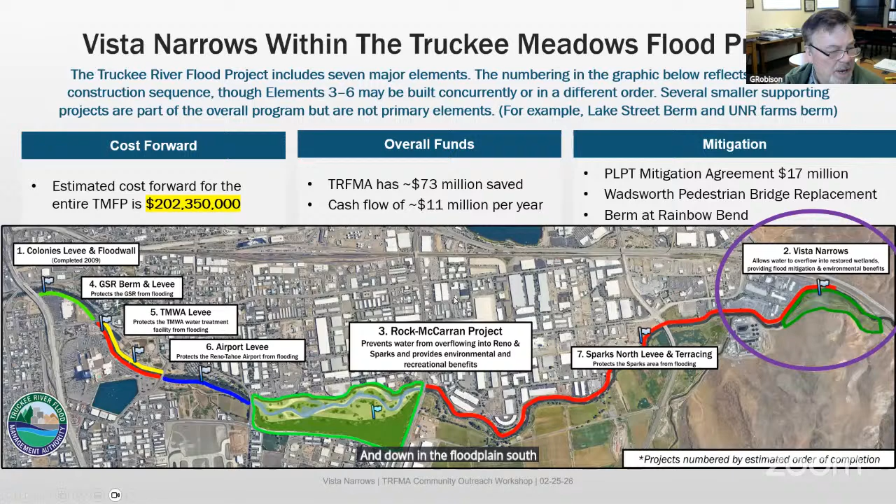So why are we doing this? We want to take this area—in a large flood, all this in blue becomes flooded. And if we do build the Meadows project, everything in green is taken out of flooding.

This area encompasses the Sparks industrial area down here in the downstream part where my cursor is, then the west Sparks industrial area, then the GSR area, the airport, and the Reno industrial area. These are all areas with lots of jobs, lots of people working, and some housing.

Taking all this out is a huge amount of the total damage of a flood. It amounts to 75 to 80% of the total damage you'd see in a large flood in the Reno Sparks area.

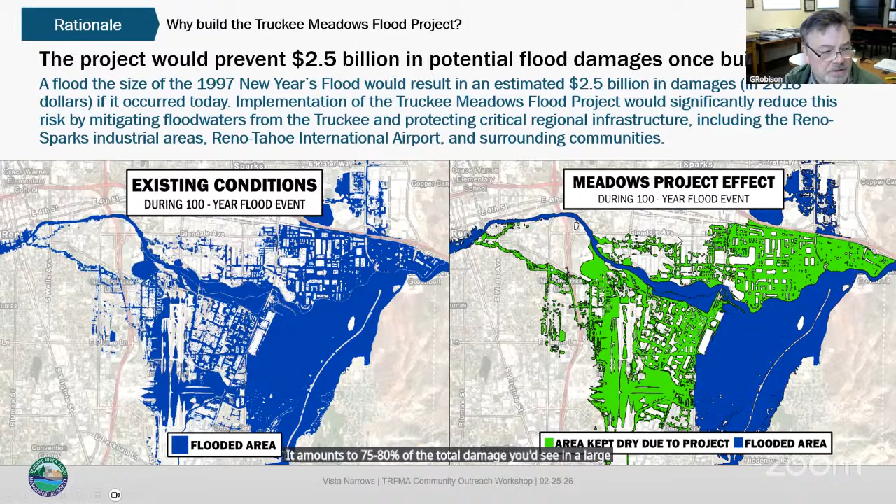So what is the Vista Narrows project specifically? It's basically 3 terraces. We used to have up to 6, but through various analysis we did very detailed modeling. Our consultant, Atkins Realis, with a team of other consultants such as HDR and JUB and others, built a very detailed 2-dimensional model and did lots and lots of iterations.

We did this to figure out how much we need to shave off here to create a flood flow that keeps the water level down upstream, but minimizes the amount of water that's going to go further downstream—limiting the water upstream, but not having too much water going downstream.

Through that iterative analysis, we were able to get this to a place where these three terraces look like what we're going to be doing. In the final design, we now have a more sophisticated model, and we're going to double check that and really hone down on these terraces, possibly saving a bit more money than it already will by going from 6 terraces to 3, and also get this to the optimum for the water level versus the peak flow downstream.

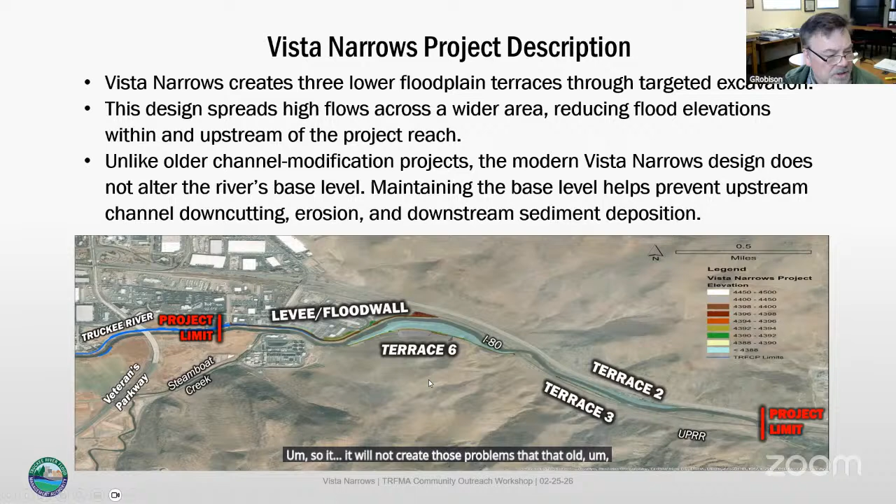The history of the Vista Narrows project is that Vista was always going to be done because it provides mitigation for the rest of Reno. There's a lot of water stored in the airport and industrial areas. When you develop all that and dry them up, all that water is going to come down at once and create a higher water level, backing up into the university area and also into places like Pembroke and Hidden Valley. We don't want to create a better situation in one place and make it worse somewhere else. We want to make sure we're not making things worse in other parts of Reno and Sparks. So what this does is lower that water level to make up for that loss of storage.

This idea has been around for about 25 years. However, a serious design—not just people's ideas and sketches—was never done until the spring of 2018, which culminated in a 65% level design in 2019.

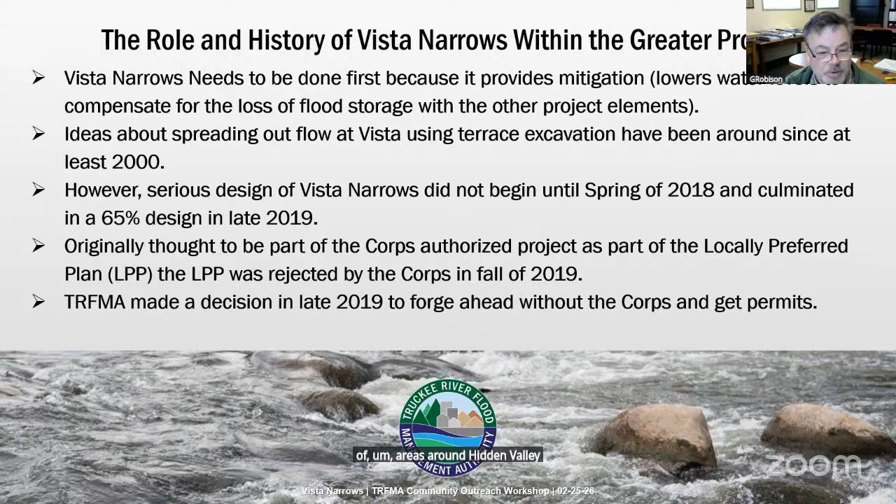So what I was saying is that a lot of water is stored in these green areas. When it was originally flooding, some of these places had 10-foot deep water in some of this area here, which is no longer holding water if we build the project. That way the water comes down here much faster into this area and raises the water level without the effect of Vista Narrows. So when you open this up a bit, that allows the water to come out and keep this water level at or below what it was originally.

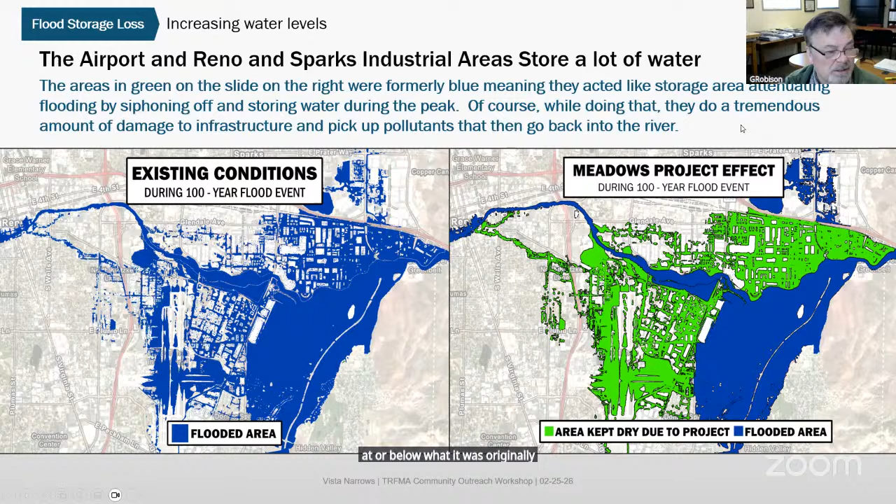So that's what this looks like. Everything in green is actually a lower water level. This would be almost the same—up to about a foot difference. So you can see all lower water levels because of Vista Narrows with the entire project built out. These other colors are actually rises in water levels, but that's staying within the river itself, inside the levees. The point is, it's all lower, and that's what we want. We want a no-rise in water surface elevation, so we don't cause more problems for people by drying out these other areas.

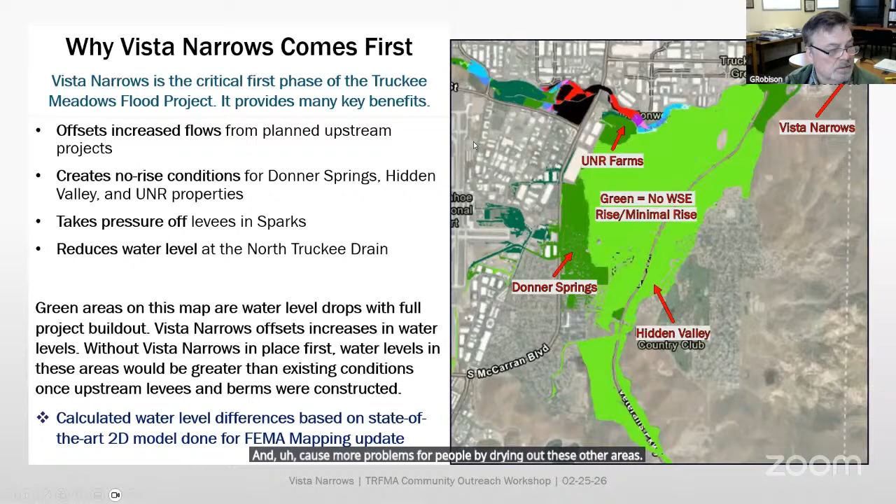So how do we do that? What does it look like? This is a picture from a few years back of Vista Narrows. You can see this bank is 15 feet high, and the vegetation on top is something called white top, a very dry, introduced species, along with sagebrush and things like that. This is a floodplain, or a high terrace, disconnected from the river because the river has downcut.

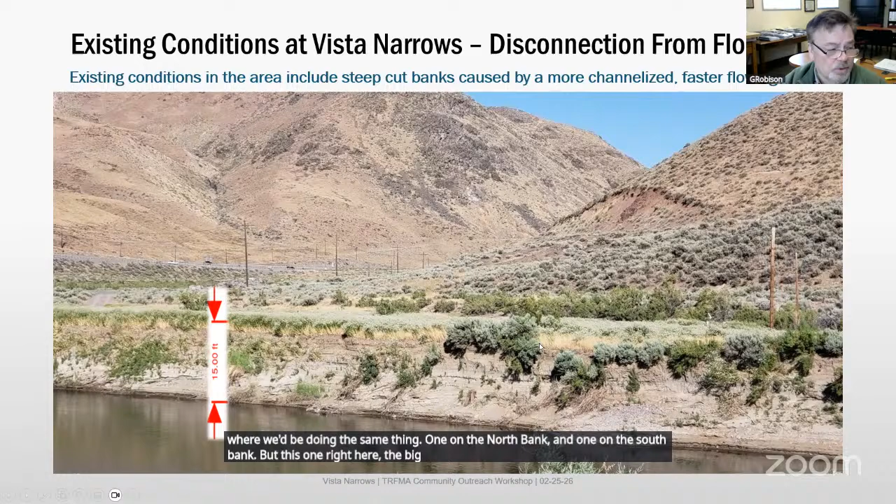So that's 15 feet right there. The idea would be to cut this down to a much lower level where the river can interact with more natural vegetation such as cottonwoods, willows, other species, so you can create this area where the water can spread out to the south at this particular terrace. There's two more terraces downstream where we'd do the same thing, one on the north bank and one on the south bank. This big terrace here is on the north bank, and the idea is to cut this down.

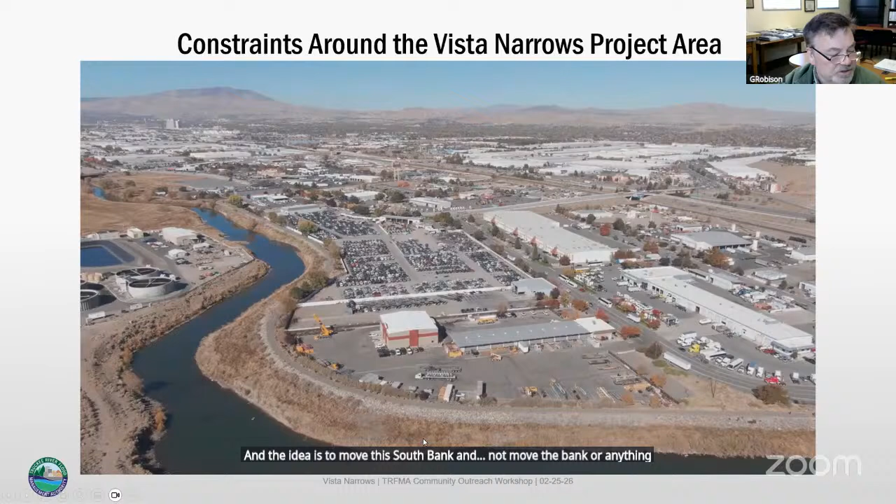I saw Dick Mills in the audience - I know he's very familiar with some of these properties because he owns them. But the point is, it's a very tight area here, and it remains tight down here at the bottom of this picture. The idea is to move this south bank - not move the bank or anything, but actually lower the floodplain on that south side. So here's that south side, and you can see how tight it is right here. It's to bring this down, bring all this down right through here.

450,000 cubic yards of material. Doesn't look like much in this picture from the sky, but that's 15 feet of material there that we'd bring down, probably 10 to 12 feet of it for a large area, to allow this river to spread out during high flows. You can see it over here - now you can see how deep it is. Very high bank here. So you excavate this down, and that's how you get this condition where we no longer have these degraded cut banks.

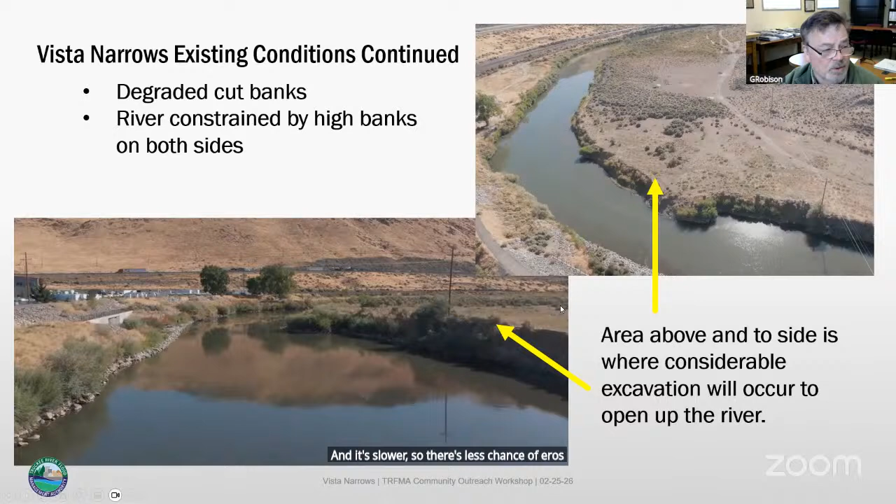We have a restored floodplain with natural vegetation that's less apt for sedimentation. You also have water flowing out over this that lowers the water level, and it's slower, so there's less chance of erosion as well. So this is what it looks like in a cross section.

This is the original height in this particular cross section. This is just one example, and it's simplified - we have dozens of design drawings where it's very detailed of exactly what you do. But the idea is to have a very flat area, then a gradual up, then another intermediate floodplain, a little bit up, and this is pretty much up on the top here, but you actually don't catch all the way up to here. So really all this area is now open for flood water to flow through, where before it was just over here. So you're really opening this up is the idea.

We'll have a talk after the talk I'm giving about kind of the environmental side, what this looks like in terms of vegetation, environmental, etc.

This slide below here is actually down in the lower reach where this was spread out. You can see how wide this river is, and it slows it down and allows native vegetation to start growing on the bank, native vegetation over here, but also just slowing it down, widening it out. So it's much more connected with its floodplain - you get better groundwater, and also just lowering that water level.

So what is going on with Vista Narrows? We use the word hydraulics, but that's just the water behavior, for lack of a better term - what is the water doing, what are some of the goals, what is going on here? Well, we want to avoid impacting low flow, so we're staying out of the channel. This is all out of the regular channel - these are terraces and floodplains, not in the channel.

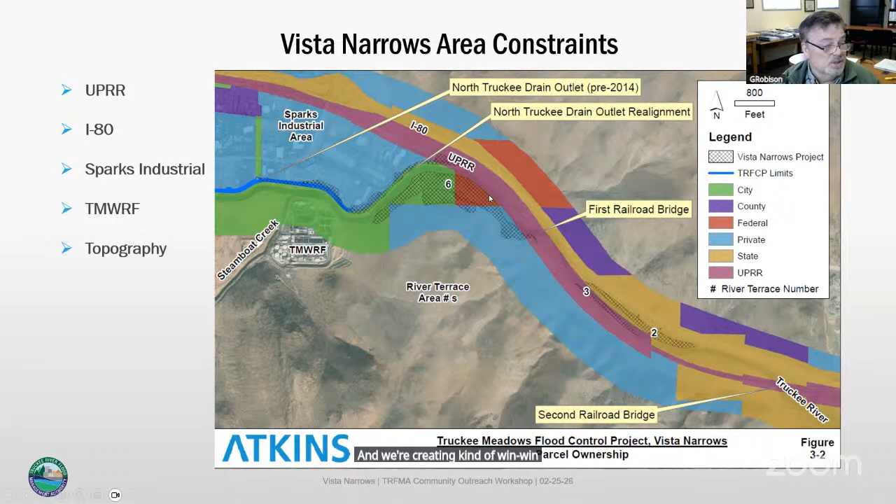We have to work with a lot of partners here to make sure we are not doing anything harmful to them, and we're creating win-win situations wherever possible with this project. So what makes it challenging is all those easements. That's very challenging for us, to work with all these different people and make sure we can get the ingress and egress for the work. There's also a known landslide on the south side that we have to work within and nearby. We also have to make sure we're not generating sediment, and for the dirt we do generate, find a good place for it, so we're talking with other people doing other work in the area about our dirt as well.

We also have to mitigate downstream impacts from this project, because the whole project does add quite a bit of water. I'll show you that here in a second. How do we mitigate that downstream? Because we don't want to just mitigate the impacts in Reno. We want to make sure the people downstream are in as good a shape or better after this project is built. So we have to take care and make sure we are making a good effort to mitigate all those impacts that we may be causing by the extra water.

So what I mean by extra water: at the very highest peak flow, there is an increase. The 100-year flow, which we calculate using statistical frequency analysis, is 21,165. This is right at Vista Narrows, where there's a gauge. With the project, post-project, using an earlier model, we found it went up to 23,563. That's with full project build-out, with all the terraces and the rest of the project, all the levees and flood walls combined. That is an increase of roughly 2,400 CFS, or about 11%.

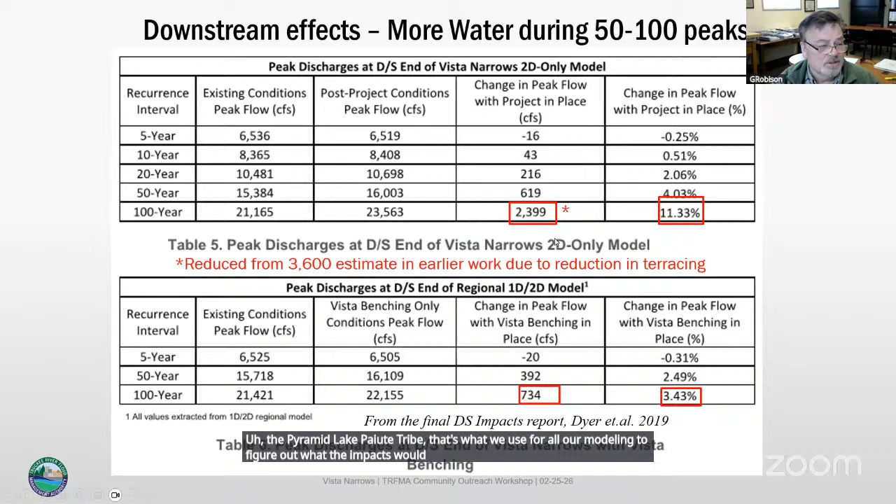That's what we used for all our modeling to figure out what the impacts would be downstream and how they might need to be mitigated. So this is what it looks like, this is called a hydrograph.

In a 5-year flow, a smaller peak flow, you can see we're only around 6,000 to 7,000 cubic feet per second, which is a much smaller flow. You can see no real difference in the two peaks because the spreading out, all the things we're doing upstream really isn't changing things too much from what we already do.

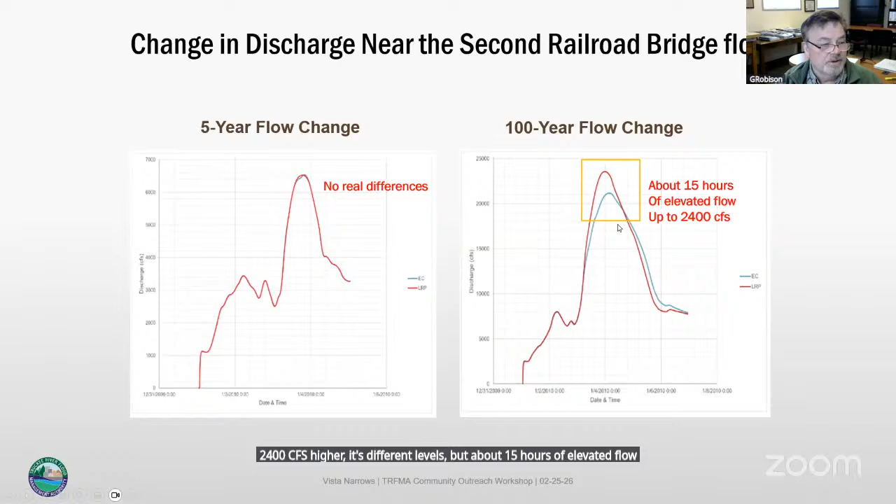But at the 100-year, it increases it because of all that storage that is now lost. We're not storing water at the airport and messing up the airport. We're not storing water in the industrial area and causing literally billions of dollars of damage. We're now flushing it through, and you can see it's higher, but it's only higher for about 15 hours. And it's not always 2,400 CFS higher. It's different levels, but about 15 hours of elevated flow up to 2,400 CFS difference at the peak.

So what we did is we wanted to see what that change would look like downstream. There was a hydraulic analysis done, which just means water behavior analysis. We wanted to see what the peak flow looked like downstream at all these different places along the stream. We also wanted to see the water surface elevation, or how high the water is, how the inundation is all along the stream. We wanted to see how it changed velocities with that extra water, and how it changed inundation, how far out it would extend, and what was the extent of it downstream because of those differences.

We also did analysis of sediment, banks, and habitat. So we had sedimentation impacts analysis, stream bed mobilization analysis, and bank retreat analysis. We wanted to see how that extra water might change the form of this river, or might do things to this river. We did this by running it through a model for hundreds and hundreds of runs to see what that would do.

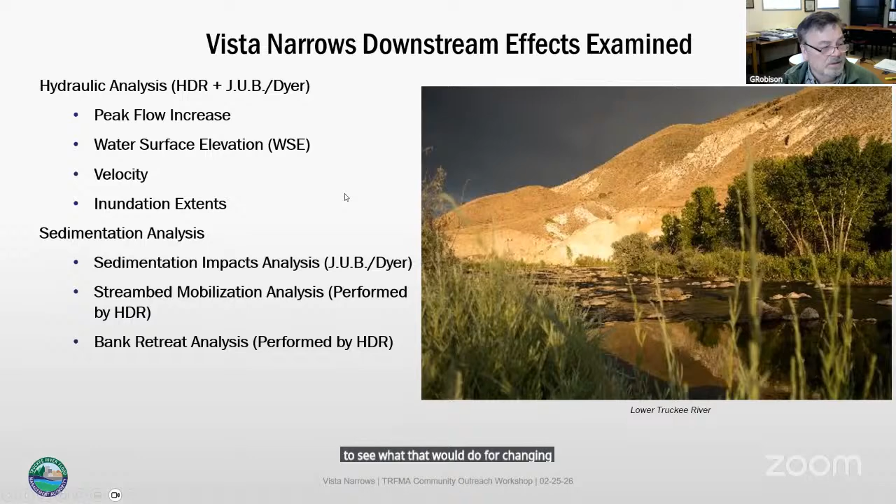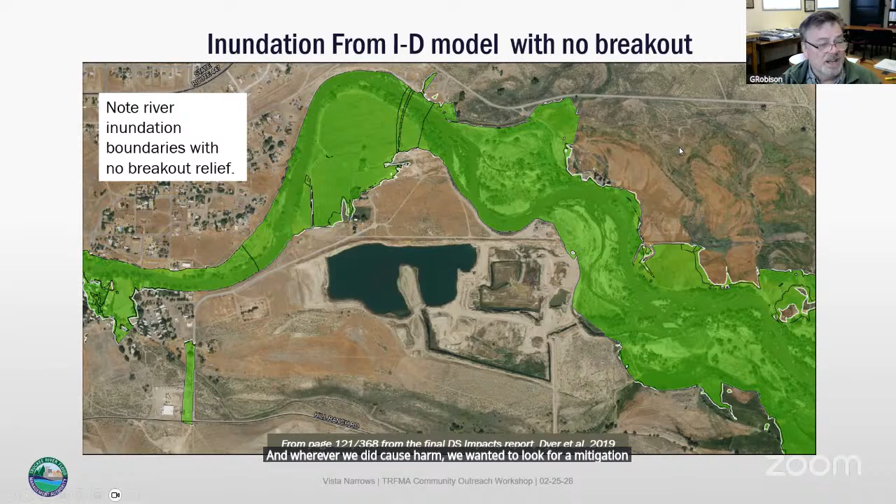And we actually remodeled this area in 2D and we found some issues that we didn't see in the 1D. But I'll get to that in a second. The point is that we looked at this all along the river to make sure we weren't causing harm. And wherever we did cause harm, we wanted to look for a mitigation solution because of Vista Narrows and the total project. So this is kind of the overall results in a nutshell. Remember, this is roughly hundreds and hundreds of pages of results that I'm boiling down here, and I can't in a half hour talk give you everything.

But what we found is we had criteria for high impact. We had criteria like: is there a potential for loss of life? Is there newly inundated structures or infrastructure? Is there increased potential damage to a critical facility? Is there a high potential for increased sediment transport? We found one place where there was, especially with this newly inundated structure, and that was Wadsworth.

And then for moderate impact, Rainbow Bend or Lockwood, that area, we found there is some extra inundation on the roads, not necessarily to homes, but on the roads it's a nuisance. We wanted to make sure that wasn't a problem, so we've talked to the Lockwood people as well as the Wadsworth people on what we can do to mitigate that. We'll show you those solutions here in a minute.

And then there were places we just found minor impacts, here's the criteria: the increase in inundation height or water surface elevation, and whether there were any newly inundated structures. If not, that was a criteria to put it down into moderate. You can see there are minor impact areas as well. These were all looked at. We found Wadsworth could be a problem, and we found Rainbow Bend area had some nuisance flooding on the roadways. Those were the two things we found.

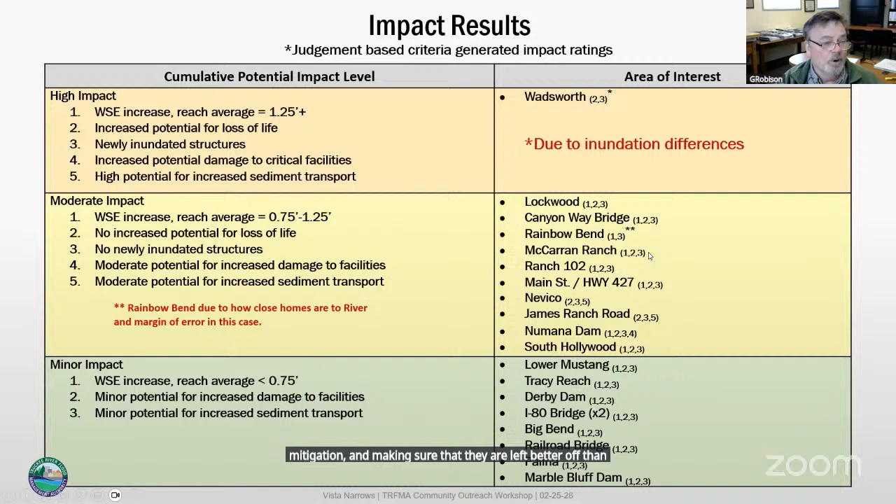So we looked at very specialized areas in cooperation with the Pyramid Lake Paiute tribe. These were selected spots, many chosen by the tribe. These other areas in green are places where, in the past, in cooperation with others such as the Nature Conservancy, we did floodplain restoration, like what we're doing at Vista, or like what we're going to be doing at McCarran Ranch. So these are previous areas where this was done, shown in dark green.

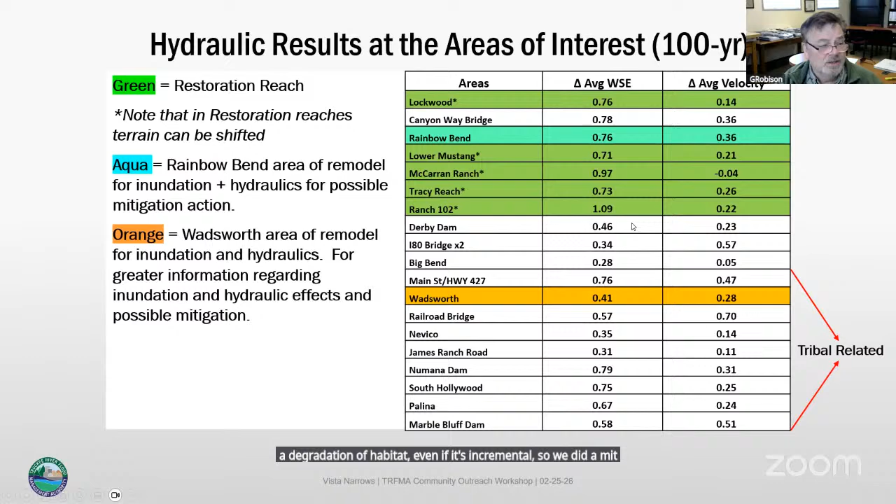Rainbow Bend is an area we were concerned about, and we did find a concern with that flooding I talked about. Wadsworth also has some concern you'll see in a minute. But for the rest of this, we really didn't find specific concerns. However, there's a general concern that we do not want to see a degradation of habitat, even if it's incremental. So we did a mitigation agreement with the Pyramid Lake Paiute tribe over that.

So this is our sedimentation results, and like I said, those were all minor incremental impacts. The idea was, is this picking up more sediment? Is it going to change the form of the river? Is it going to create deposition zones or scour zones? We didn't really see that.

Would it make bank retreat worse than it already is? There is some severe bank retreat on the lower Truckee River, but we didn't see our project causing much more of it. However, we wanted to help out with that, and so we did a pretty sizable mitigation projects agreement with the Pyramid Lake Paiute tribe.

So getting to why we did what we did, we had existing data from the model, like from the 1980s. This is a map of where Long Valley Creek comes in, and this is Lockwood here, and this is Rainbow Bend in this area. What we found is, okay, there's all this stuff going on, but we're not really sure what is because of this creek and what is because of increased flooding on the river. So we didn't really have a good fix on that.

So what we decided to do is some better modeling. When we did what was called the physical map revision, which was done for redoing the maps, TRFMA actually funded that and had a consultant do it. We had better cross sections, but even then we didn't really have enough information to distinguish all that out. So on top of that, we did two-dimensional modeling. That's the level of information with the physical map revision, which is much more information than the old model.

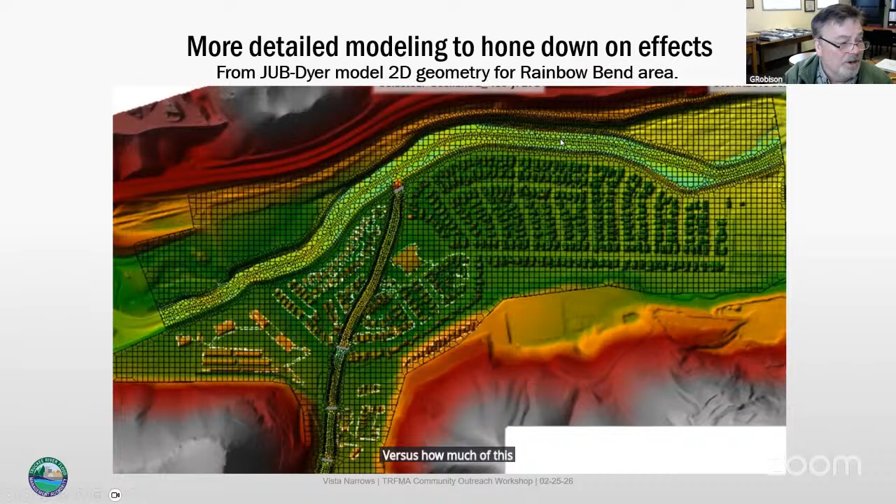And the detail we needed gave an idea of how fast that water was going, what kind of scour was it causing, how deep was it, is it dangerous, is it going to sweep somebody away. All those kinds of questions we wanted to answer. And how much of this was from the creek versus how much was from the river? And if from the river, how much would the extra 2,400 CFS from Vista impact this? So there were a lot of questions to ask here.

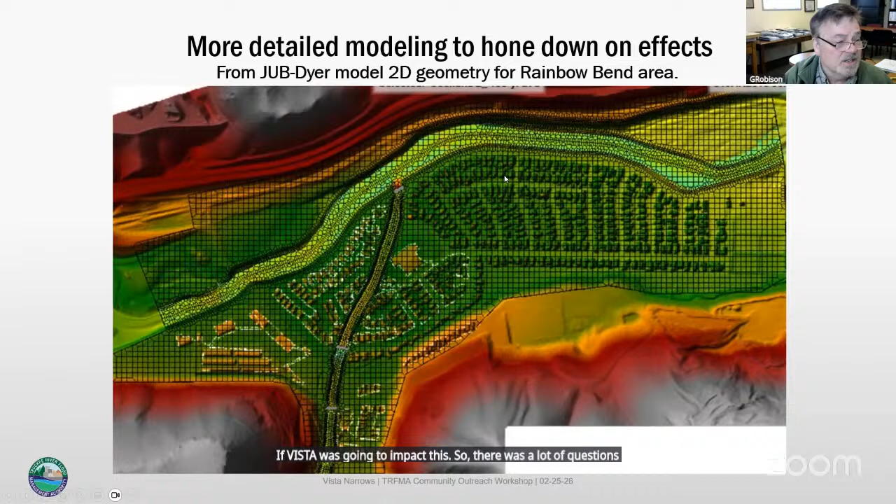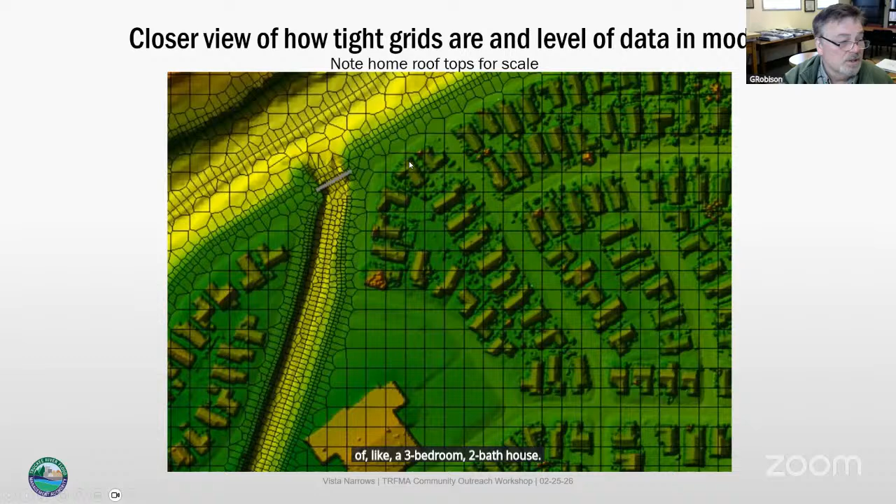So what we did, this is just a blow up showing how detailed this is. That's the rooftop of like a 3-bedroom, 2-bath house, so you can see how small these are. Look at how small these are compared to that.

So what we did in the hydraulic analysis is we broke out runs that isolated just the creek, and then we did runs that looked at the river and the creek together at different levels. We wanted to see what would happen. What we found was a lot of what was on that original map was from what the creek was doing at these very high flows. It wasn't minimal overtopping, it was extreme overtopping, even when the Truckee River was running low, because of what Long Valley Creek was doing. But when the Truckee and the creek were going together, there was some minimal overtopping, and that's what we wanted to mitigate.

That's not because of our project. We're not mitigating that. However, we did help Storey County in looking into that and trying to get some funding from other agencies about how to fix that. So I didn't ignore that problem, but it's not because of the Vista Narrows or the overall Meadows project.

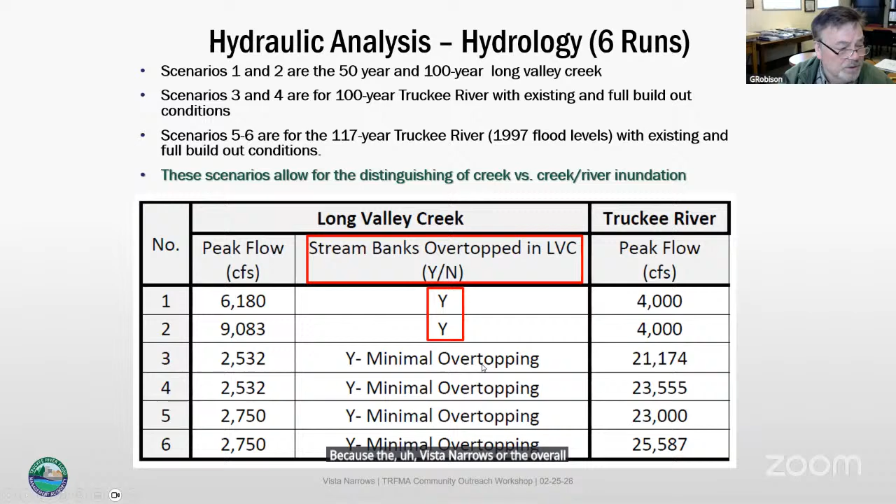So what you can see here is when you do the 100 and 117 year, you can see there's a little extra water from the 117 year, in red. The blue is just the 100 year. We wanted to check and see what this does to this community. We have a considerable flow going down Long Valley, but not a gigantic cloudburst thunderstorm flow in the summer—that's a totally different phenomena.

So anyways, we wanted to see what the river itself was doing, not the creek. And you can see here's what it looks like. You can note that most of this is dry, all of this through here—it's not going over the top. There's not this huge area and all that, because it's really the creek that does that.

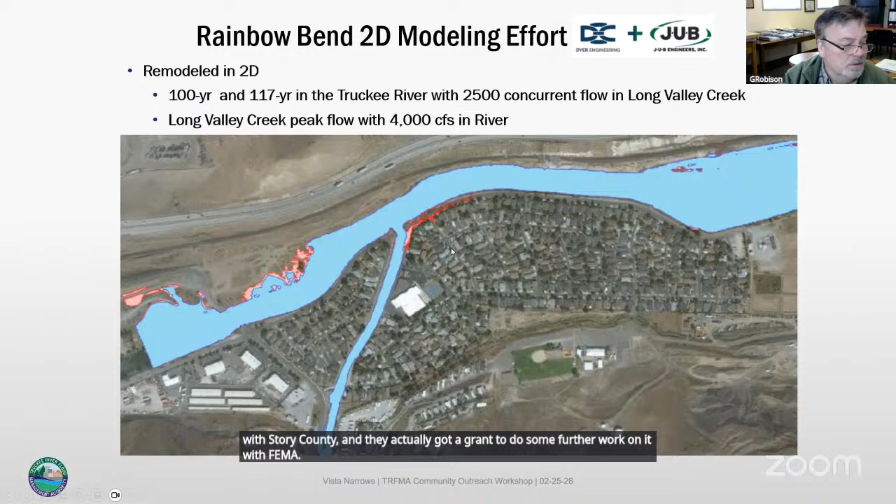And we have many maps of what that looks like, and we shared all those with Storey County, and they actually got a grant to do some further work on it with FEMA. So here's another one, and this is really the key one. This is a 117-year event, so this would be the 97 event flow.

You can see this area in red is because of the extra water from the project, and that water gets on the streets—it's nuisance water. So we looked at that and said, well, how can we stop that? Because we're causing that—we're causing the areas in red here.

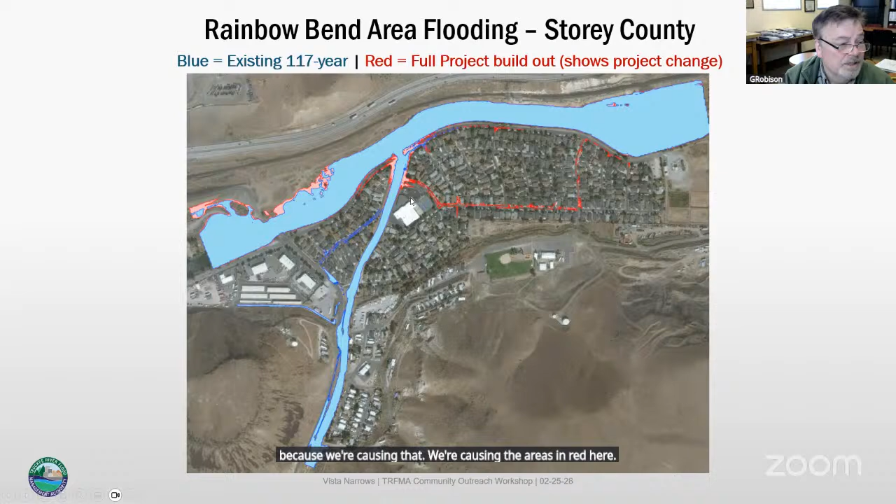So we looked at that in more detail, and what I came up with was small berms here, here, here, and here. These are only like a foot to two foot high, small berms, and if we did that, we would get rid of all of that, and it would be the same—in fact, it would be better for flooding than it is now. So by doing that sort of thing, we can actually make the situation better for the people there, even with the extra flow from the project. And that's the idea here.

And this would not cost that much money—it's in the hundreds of thousands estimate. But the idea is we will probably re-engage with Storey County once we work on Vista, and really think through how to mitigate issues with the extra water that will be coming in there, so that they don't have nuisance water on their roads.

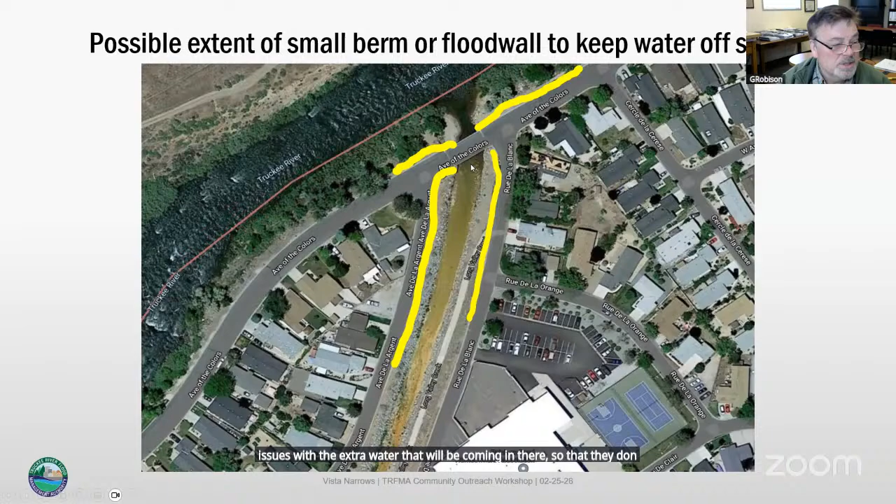So the other place where we saw a real problem along with that was down at Wadsworth, and this was a little more of a serious problem. The idea is that these homes along here—there's an old bridge here that really, when the water comes, gets involved with the river and starts backing up water. And when we add 2,400 CFS to this flow, there's actually more backing up and more issues. In fact, the water starts to back up and goes down this, gets some more of these, and it does cause a problem.

So we needed to find a way to mitigate this, either by maybe putting up a levee or a flood wall along here, maybe replacing this bridge or getting rid of the bridge so the flow goes through more smoothly. Maybe that will do the trick. So we looked at all that.

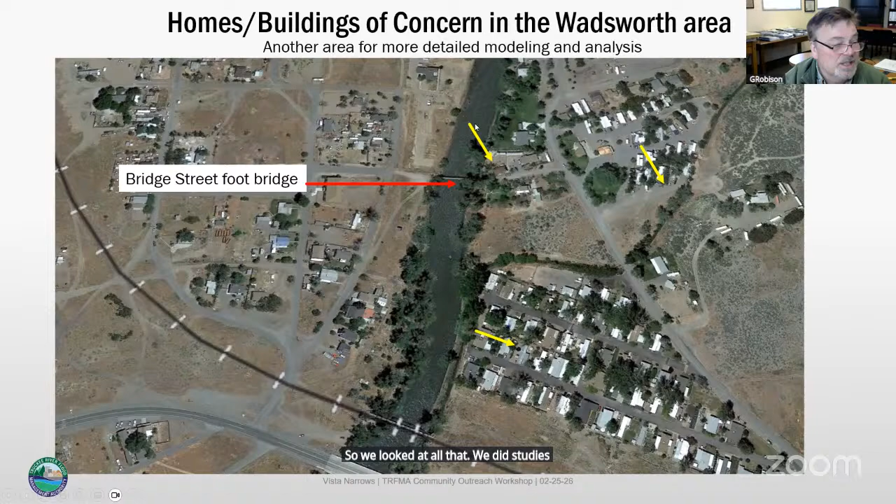So we looked at lots of different ideas about how to fix this. We actually did a detailed study on bridge replacement, a levee with bridge replacement, a flood wall with bridge replacement, and then just using fill and building it all up.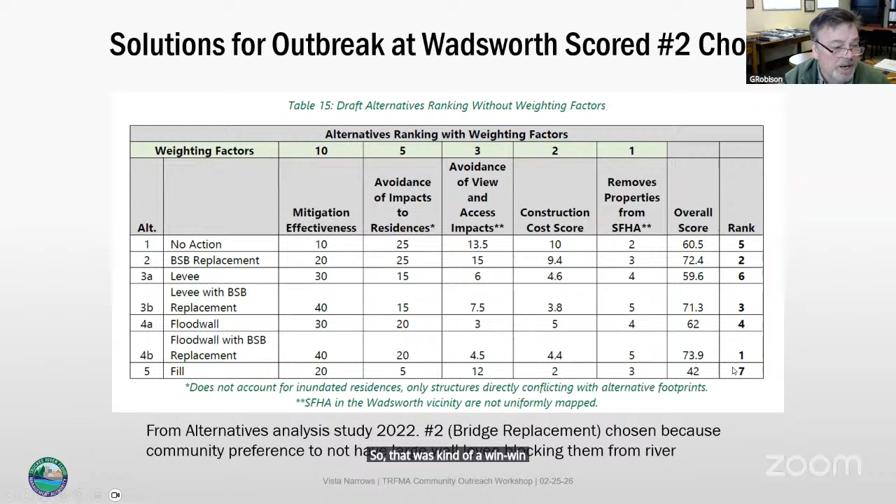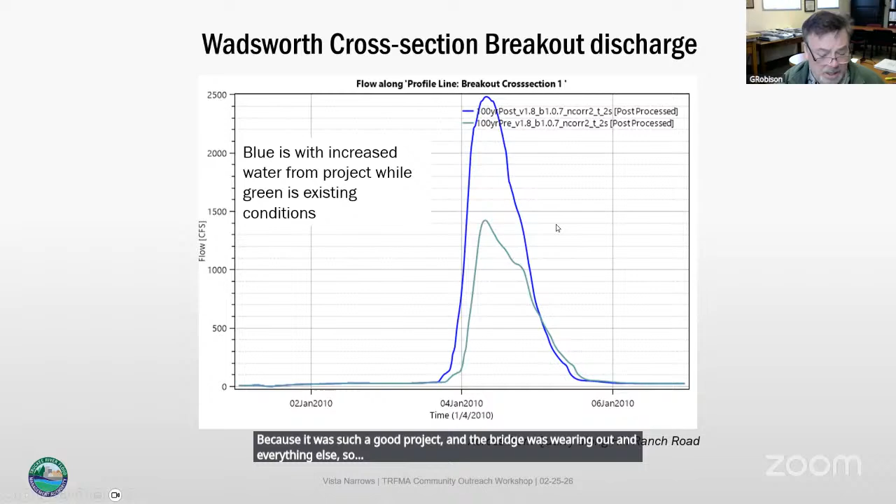So by doing this, you actually have less. To go back here, the hydrograph now is at less than what it was before. So I'm actually improving, or the mitigation is improving the condition here, with or without the project. Because it was such a good project and did so much good even without building Vista Narrows or the rest of the project, our board voted to do this regardless, because it was such a good project and the bridge was wearing out and everything else. So that is a great example of doing a lot of study and getting a good mitigation solution on a bridge.

But you think, wait a minute, I thought Vista was up by Sparks. What are we doing down here in Wadsworth? This is downstream mitigation. You have to look at every effect that you have and make sure that you're leaving people in a better position than they were before.

So the mitigation solutions after the analysis and community discussion have already happened. Rainbow Bend, we discussed, we had a community meeting, and we're going to revisit this after Vista proceeds further, like when we start construction, we'll talk to them about exactly what they want to do. But we've had preliminary discussions; we talked to the county and the local community there. The next thing is Wadsworth. The construction right now is in process. It's already been designed.

The bridge replacement is going to be going up this summer when school's out because children use that bridge to go to school. But next summer, that bridge will be replaced.

And then with the Pyramid Lake Paiute tribe, regarding the environmental and stream changes, the small incremental changes, we put a fund in escrow for that. That fund will be able to be accessed as soon as we start construction on Vista Narrows. So that's how mitigation works. You look for these problems, you create a rationale for a fix, a justification for a fix, and then you proceed and then you get these things.

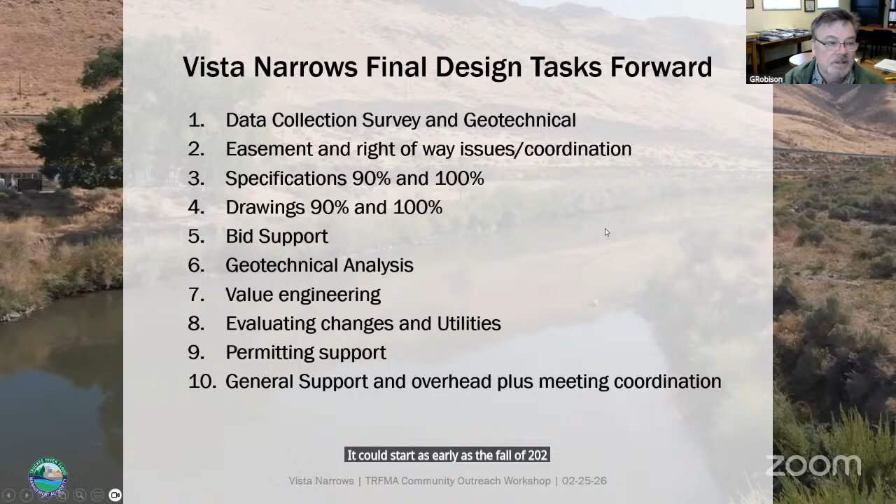We need the permit, the key permit that we need, which is called a 408 from the Army Corps of Engineers. Once we have that, we will be able to start construction. It could start as early as the fall of 2027, more likely in 2028. So this is kind of giving you this idea of when this will all occur with this final design activity.

Early next year is when the target would be to go out to bid, and the permit also would have to go. We're going to have a separate talk on the permitting and environmental here in a second, but this gives you an idea of where we're at with the design work. With the design development and design support, we're doing value engineering and cost analysis and lots of other things in order to get to the place where we have 100% design.

That's where we're at with Vista Narrows. It's really exciting. We're getting to the point where you can see the light at the end of the tunnel, finally, to get this into construction for these terraces. So with that, I think we're ready for questions.

Any questions at all? All right, go ahead. I think it says Spark. You've got your mute on still. Sorry, now can you hear me now?

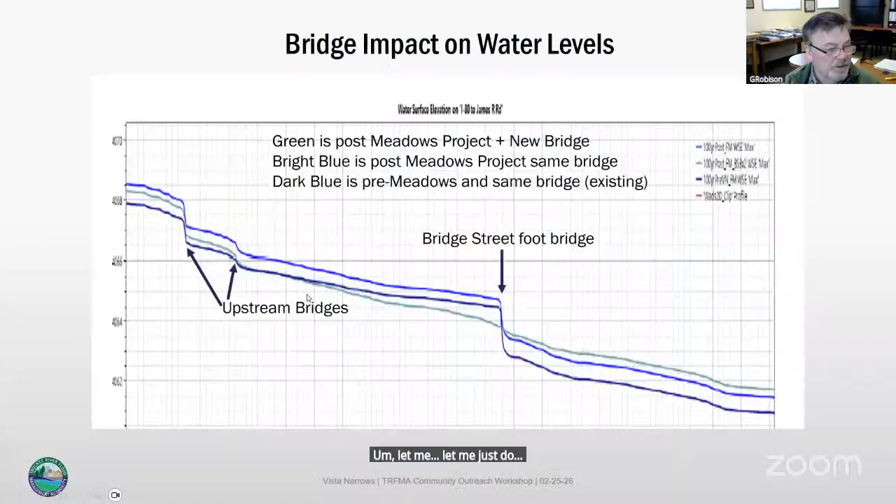The lowest floodplain that we're carving out would get inundated all the time—I mean, not like every day, but it gets inundated. Even a flood like what we're going to see in the next couple of days would inundate that. So like a 5-year or a 2-year event would do it. And then there are several other floodplains. Let me show this to you real fast, and there may be more on this in Danielle's presentation, so I don't want to steal her thunder too much here.

Thank you. As the inundation recedes and water levels drop back, at this design phase, have you considered how consistent the connection to the river would be? I'm wondering about maintaining that connection as water levels drop, or whether there's a risk of stranding any fish that moved into those terraces during higher flows.

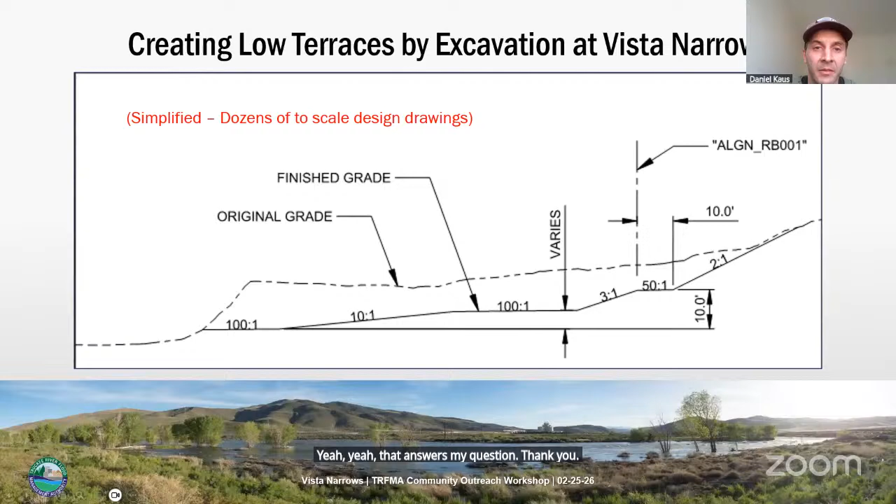Any other questions? Great questions, by the way. Looks like we're all good on questions. Yeah, it's a pretty small group today. I expect a lot more when we actually get into the final design, like the 90%.

I just wanted to do a catch-up talk here to get people oriented again to what Vista is. It's a major project, on the same scale as Rock McCarran, and in some ways it's more foundational and important. I know it doesn't do a bunch of fields and stuff, but it's really important for the area. And like I said, there are a lot of ecological issues, and that's what Danielle's presentation is going to be about. So I'm going to bow out here and let Danielle take over with what she has to say, which is more about the permitting and ecological part of this.

Okay, well thank you very much, George.

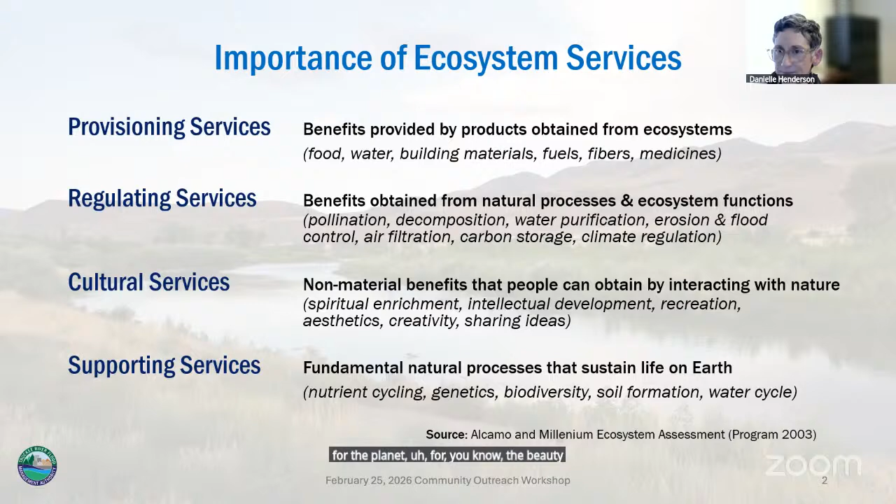I just wanted to bring up this idea of ecosystem services. I think we can all argue that healthy ecosystems have intrinsic value, but they also have value because they help create healthy communities. Ecosystem services are benefits that ecosystems provide to people. There's been research over the years to categorize these types of ecosystem services: provisioning services, regulating services, cultural and supporting services. You can see from this slide all of these benefits that people can obtain from ecosystems, as well as just having functional ecosystems for the planet, for the beauty and all of that. So there's some really important stuff in here.

I think what's important to note here is that natural floodplain systems do provide a variety of these ecosystem services. Many fall under regulating services, in terms of flood mitigation, erosion control, groundwater recharge, and water quality improvement. Also some foundational supporting services - these are the processes and functions that sustain life on Earth. Some of these supporting services include habitat provisioning and maintenance and enhancement of biodiversity, which is very important in Nevada. We are in a desert ecosystem, and these floodplains support and enhance a large portion of biodiversity in our state.

It's also important to note that the ability of an ecosystem to provide these services depends on its functional properties, so the health of that ecosystem is very important. As we have changed the land use and developed in the floodplain, it results in floodplain disconnection and altered flow, which leads to an increased risk of flooding and flood damage. So these are all important things to consider as we move forward.

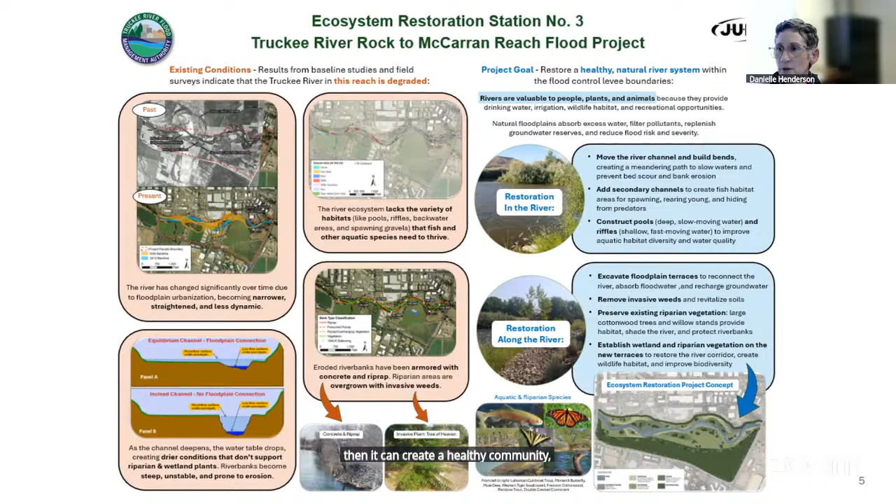In terms of floodplain restoration, we are excavating floodplain terraces - that's certainly a huge portion of what we're doing at Vista. Removing invasive weeds, preserving the existing riparian vegetation, as well as establishing new vegetation communities of native and adapted plants, and creating a functional floodplain ecosystem once again. This gets back to that idea that if the river system is healthy, it can create and sustain a healthy community, and provide all of these ecosystem services.

So jumping back to Vista Narrows, George talked a little bit about this, but in terms of more of a natural resources perspective, the Vista Narrows sort of comes from this natural bedrock outcrop, the Vista Reefs, which exists in the Truckee River east of Sparks. It creates this channel constriction and causes backwater flooding in the Truckee Meadows. And that's actually how those meadows were formed years ago.

I mean, it was a natural process. But because we developed in the floodplain, it led to issues with flooding, flood damages, risk to people and property and whatnot. So back in the 1960s, portions of the bedrock outcrop, the Vista Reefs, were removed in an attempt to do some flood control work and solve this problem. But what ended up happening was an unintended consequence - it led to channel incision of the river and also widespread habitat loss. And unfortunately, it also did not solve the problem of backwater flooding at Vista Narrows.

I just wanted to take a moment to acknowledge our design team. We've had lots of different consultants work on this project on the engineering side and on the environmental and cultural resources side. We're excited that we're working with this incumbent team to move the project to 100% design. I just wanted to thank everybody for the work that's gone on over all these years.

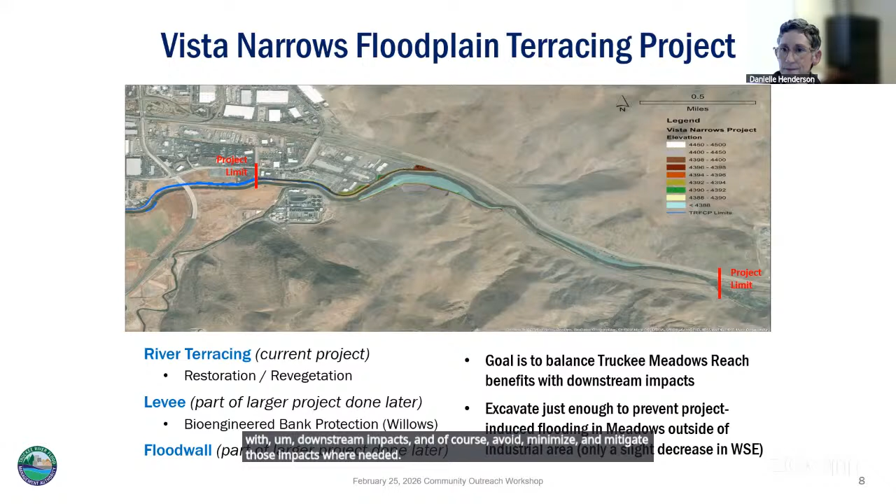This is just the project at a glance. George went over a lot of this, so I won't spend too much time on it. Some of the challenges and constraints that we have - George mentioned some of these.

I would also say that we do have a lot of invasive weeds in this area, including tall whitetop. So we have to find a way to address that. And also there's always this question of mercury and the potential for mobilizing that mercury in the sediments and methylation, which of course is a very bad thing. So we've got to address that in our project designs.

In terms of construction highlights, we are talking about a lot of excavation here. And again, I want to stress that this is not any excavation or work that's going on in the channel. This is excavating these floodplains on either side of the existing channel. So we're staying out of the channel, but this is still a significant amount of excavation.

3 floodplain terraces. We started out with 6, but as we iterated the design and figured out exactly what we needed to balance upstream and downstream, we came up with 3 that would do the job. This involves about 8,600 linear feet of riverbank. We are proposing 37 acres of revegetation, including up to about 13 acres of wetlands. So that will all be new habitat that's created as part of this project.

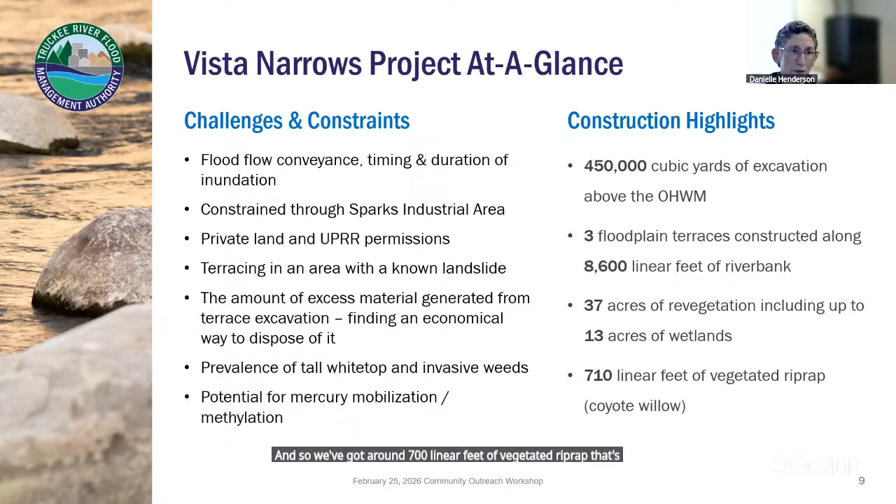So George spoke at length about the hydraulics for the project and the modeling. This was extensive work that was done for this project. I just wanted to throw this up here because it's a really cool graphic of model output. And it also shows that we're really trying to optimize these terraces.

This is in terms of the location, the area, the geometry, the different inundation levels, which were touched on in some questions earlier. We are engineering these terraces to inundate frequently enough to sustain the riparian and wetland vegetation, create a sustainable habitat. We want to avoid impacting low flow conditions. And again, balance upstream with downstream, avoid, minimize, mitigate where we need to.

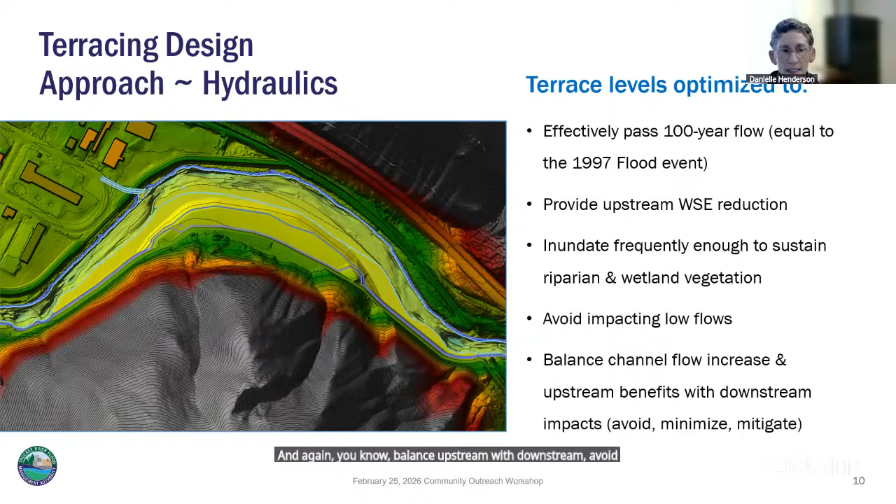This is an interesting comparison. Again, the previous slide was of Terrace 6, the largest terrace, so it's the most exciting one. Here we're comparing pre-existing conditions and post-construction conditions. What you can see from these flow vectors is that in existing conditions, there's only partial inundation of the land available to be a floodplain, just in terms of the lateral extent. Right now it's too high to be inundated, so only part of it is inundated.

There's large areas of ineffective flow, and there's also high energy flow. If you look at these arrows going right toward the river channel in yellow, they're impacting those riverbanks, causing stress on the banks and increasing the risk of erosion, which carries with it sedimentation issues and water quality problems.

Contrast that with post-construction and this engineered floodplain terrace that's been excavated to provide much more consistent inundation of that floodplain, really activating that entire area for the benefit of maintaining this habitat. The ineffective flow areas are greatly reduced, and you can see the flow lines, direction, and velocities have been reduced and redirected away from the banks, so you're not putting that stress on the banks and you're decreasing the risk of erosion.

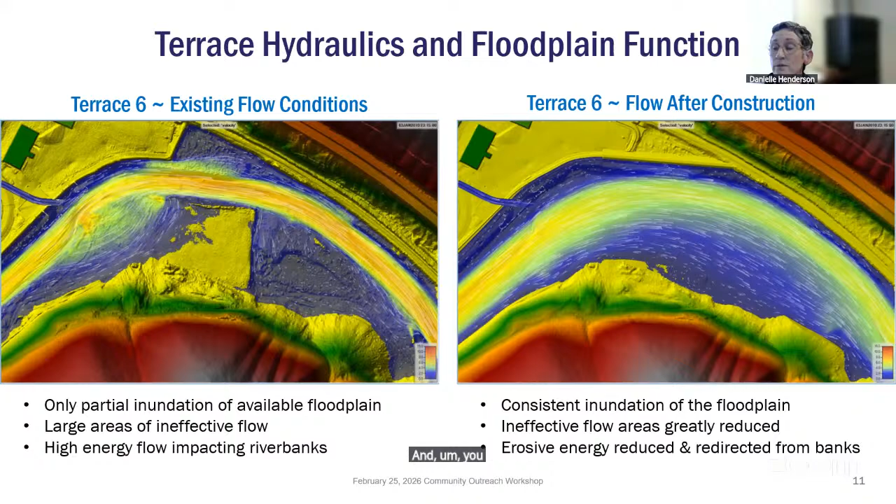In terms of revegetation, that's the second part of this. The first part is to excavate the terraces and do all the construction for flood control benefits. The second part is to revegetate those terrace surfaces, so we're actually creating that riparian and wetland habitat.

You saw one of these graphics earlier in George's talk, but to reiterate the importance of this, we're talking about a lot of excavation and lowering the existing ground to create these terraces that have a gentle slope tying in with existing ground at the back end. As it slopes up, we've keyed that into different levels and frequencies of inundation that support different types of vegetation communities.

What you see in this photo is one of these cut banks—about 15 feet of vertical cut bank that's sloughing off into the river, creating erosion, sedimentation, and water quality issues. You can see the vegetation up on this old terrace surface is no longer connected to the channel and to seasonal groundwater fluctuations, so it can't support riparian and wetland vegetation. Those plants require frequent inundation and their roots need to be close to the water table.

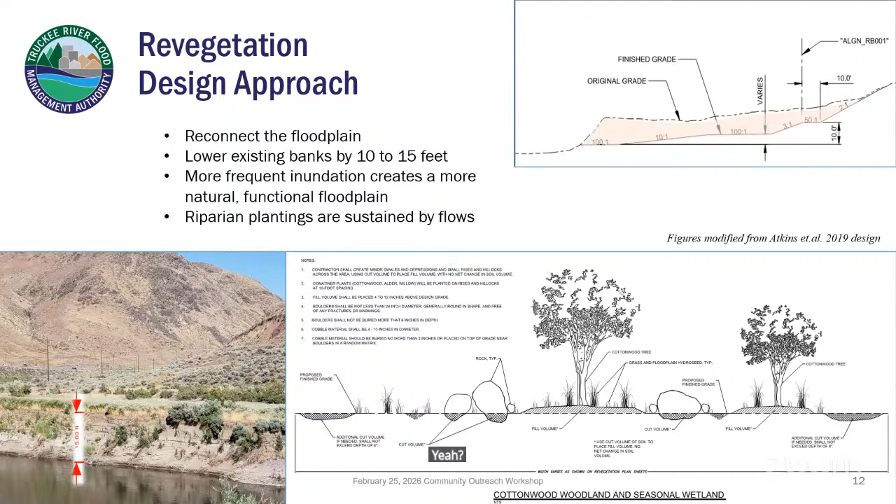Here's the cross section of the revegetated terrace area. We've got these riparian woodlands and seasonal wetlands right near the existing river channel, so those would be inundated frequently. Someone asked earlier about how frequently they would be inundated - they're designed to be inundated like every 1 to 2 years.

As we move up in the terrace, away from the river and a little higher in elevation, we move to more of a dry riparian shrub community - woods rose, silver buffalo berry, those types of plants as well as some grasses. Those areas might be inundated around the 5-year frequency. Eventually we move up higher into reclaimed upland areas with plants that are more xeric, so more drought tolerant, tolerant of dry periods. Those would include species like four-winged saltbush.

Eventually the excavated terrace ties in with existing ground. Part of what we're doing with the revegetation effort also will be to amend the soil if we need to, as well as pre-treat weeds and really try to create conditions that will maximize the success of this revegetation effort. This is going to be a multi-year effort - it could take 3 to 5 to 7 years to really establish this vegetation community on these terraces, so we're going to do everything we can upfront to really give it a jump start.

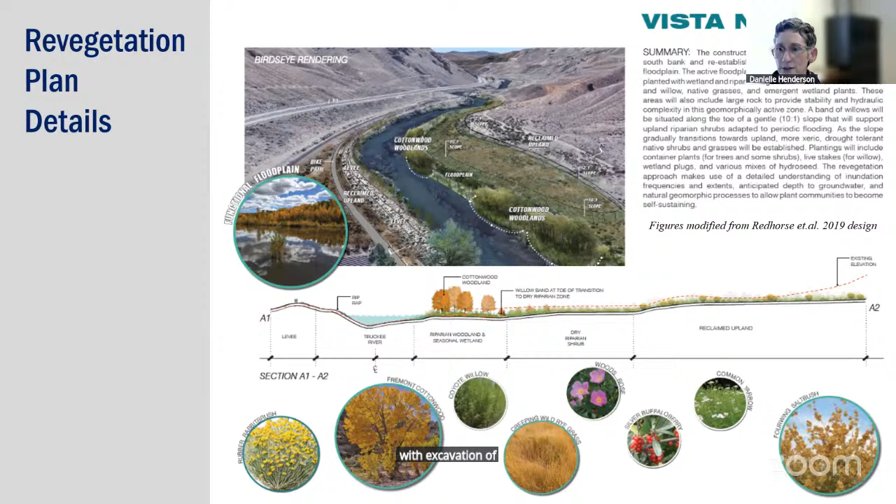Okay, let me make sure. Okay.

Some other environmental considerations we looked at when designing these terraces: we sampled the soils for mercury and other heavy metals. We did this at the existing surface and also at depth - the depth the terraces would be excavated to, so 10 to 15 feet in some areas. Thankfully, no heavy metals near limits were detected with those samples.

We are using lessons learned and methods from the Nature Conservancy's ecosystem restoration projects downstream to inform designs for revegetation and also for configuration and the slopes of these terraces, again to key in inundation with plant communities and match those up so that we have the greatest success.

Most work will be done at or above the existing stream banks, so again we are trying not to have disturbance in the stream channel. To prevent mercury methylation, the wetlands we are proposing are shallow and also designed to reduce long-term water holding, so it's more of a flow-through system and a seasonal wetland.

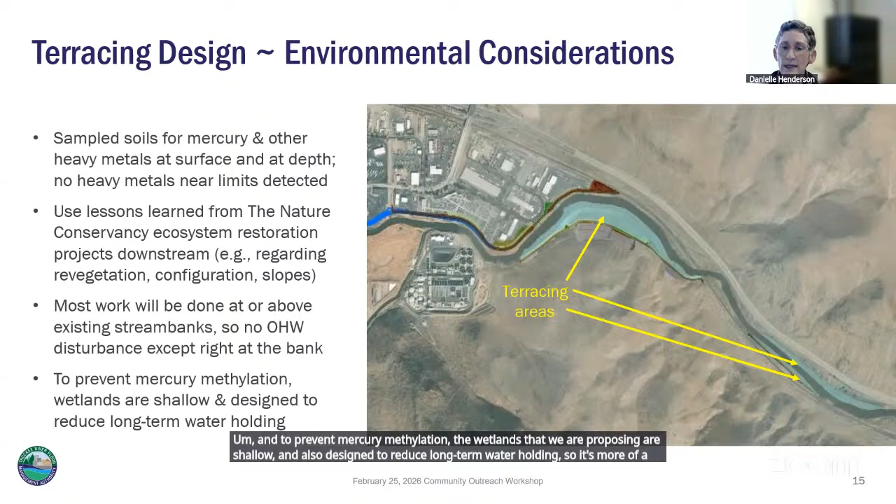I wanted to touch on this other work we've done because it's been really important for informing the Vista Narrows project, as well as designs upstream, like the Rock McCarran project. We've been involved for many years in ecosystem restoration efforts on the lower Truckee River reach, partnering with various agencies and nonprofits to implement this restoration program over a period of years. We've invested money into this, along with some grant money.

The goals of these ecosystem restoration projects included floodplain activation, decreased risk of developed property damage because we're preserving floodplains, increased stream bank stability, and water quality improvement in terms of erosion limitation, sediment, and temperature. All in all, we've helped restore about 8 miles of the river and created over 450 acres of habitat in and along the lower Truckee River.

This map on the slide is from some older planning documents. The entire lower river was broken up into these reaches, and then they were evaluated by other experts and consultants back in the day for the potential for restoration and what level of restoration might be required to realize that maximum potential. This was done way back when we were working with the Corps of Engineers, but also a local consortium of local, state, and federal agencies, and nonprofits like the Nature Conservancy. We all came together, and some of these projects have been implemented, and some are still on the books but lower priority.

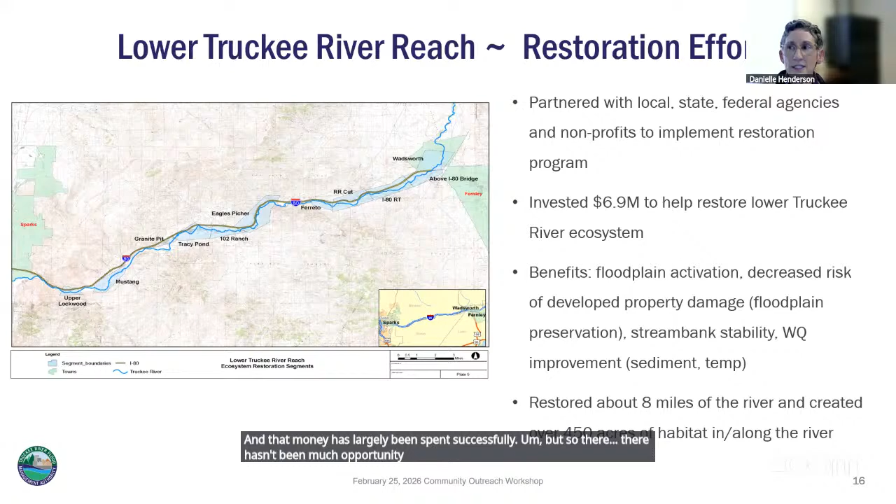A lot of the grant money was coming from Desert Terminal Lakes funding, and that money has largely been spent successfully, so there hasn't been much opportunity to continue working on these projects. But they've been very important for informing the designs and keeping that vision of a healthy, functioning Truckee River in mind for our flood project elements.

The first project done as part of this effort was by the Nature Conservancy at their McCarran Ranch Preserve. This project really served as a blueprint for Truckee River restoration, in terms of methods and techniques for working with the river, revegetating, and creating riparian and wetland areas, but also in terms of navigating the regulatory permitting process. The Truckee River is actually a very highly regulated river, and there's quite a process you have to go through to work in and around the river channel. So this project served as a blueprint for how to do these projects on the lower river. It was super helpful.

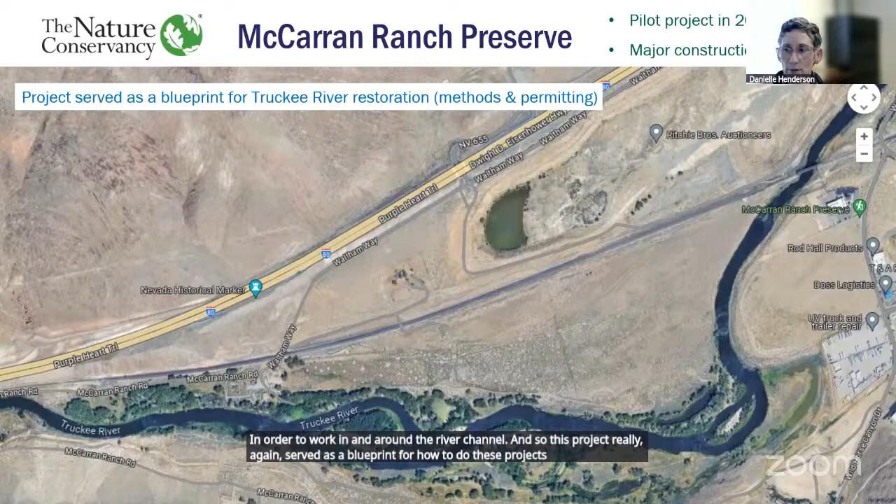I'll touch on a few of the other projects we participated in. One was the Lockwood Restoration Project, just downstream of Vista Narrows and close to where George was talking about Long Valley Creek and Rainbow Bend. There's an ecosystem restoration project there, and there's actually a recreational trailhead too that you're welcome to enjoy, managed by Washoe County Parks Department. This is interesting because the river is still fairly constrained in this area, and we did not do a lot of in-channel work here, but we still managed to create a nice meander bend with some backwater habitat, some pools and riffles in the channel, and riparian habitat in the floodplains. So this is a smaller scale project.

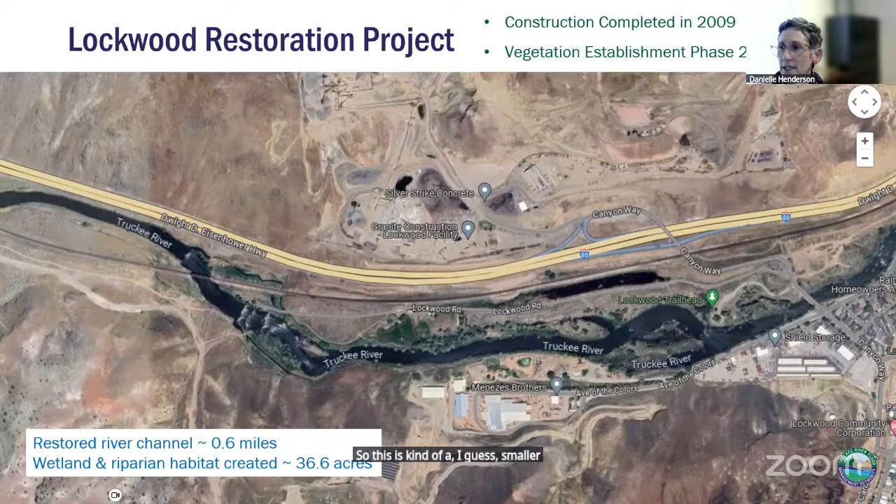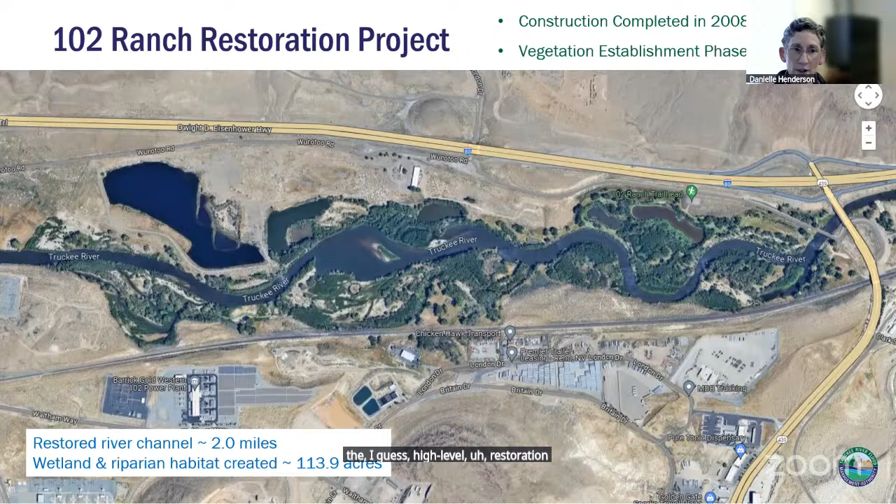The flip side of that is one of these larger scale projects, at the 102 Ranch. Again, we helped participate, assisting the Nature Conservancy. They took the lead, but we provided technical expertise, oversight, and also some funding. This is a very large project, over 100 acres of wetland and riparian habitat, with lots of meander bends. You can see riffles, pool sequences, and backwater habitat. So this is sort of the high-level restoration that's been done on the river. Those are just some examples of those types of projects.

These projects are really important because not only are we restoring that lower river and the floodplain function, but we're using that information to inform the designs for projects like Vista Narrows, Rock McCarran, and other elements of the flood project. George has talked previously about the downstream impacts that were studied. We've worked with the Pyramid Lake Paiute Tribe, and we're making sure that we address these impacts - avoid, minimize, and mitigate where we need to - so that we do no harm. That's another one of these key concepts of flood control.

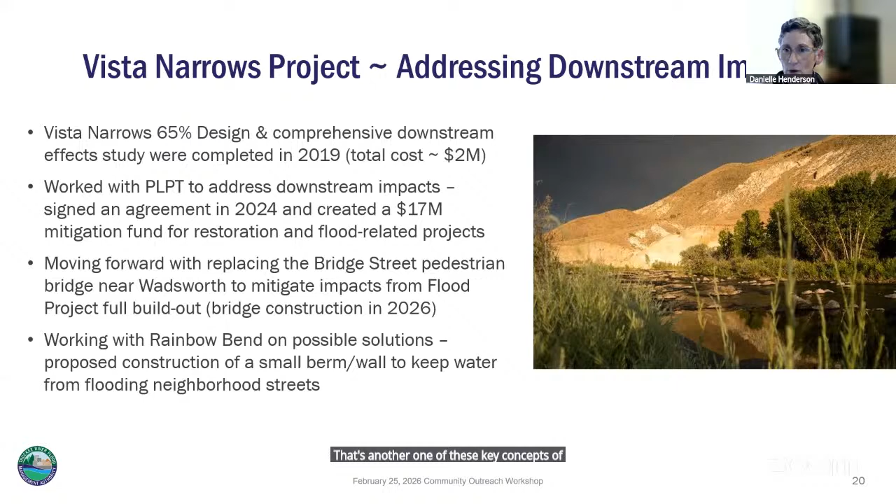That includes a revegetation plan, a weed control plan, and even a dewatering plan for during construction. We've also been doing a lot of coordination and planning, using the work from the lower Truckee River restoration sites to inform our designs. We've contacted several nurseries and suppliers of soil amendments, compost, and seeds to get a handle on what materials are available and what might be most successful for revegetating, whether it's containerized plants, seeds, soil amendments, weed control methods, or nurse crops.

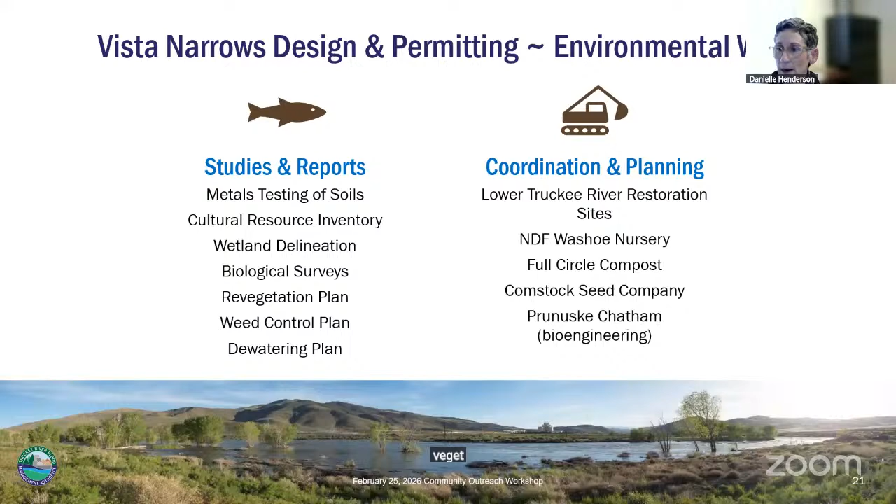So we're talking about 37 acres. We need a lot of plant material for this project, and we need to figure out how to have that plant material online, available and ready for planting when the terraces are excavated. The revegetation really does have to sync up with the major construction on site, because we can't just have a bunch of raw dirt out there—we'd have dust issues, air quality issues, and weed control issues. So it's something we've been working on and will continue to work on as we get to 100% design. We also consulted with an outside expert on the bioengineering designs for those vegetated riprap areas, and that was really helpful.

We're working with the Corps of Engineers on permitting—they're the lead federal agency. We managed to streamline things by deauthorizing the old project that was not going to provide the benefits the community wanted to see in terms of flood control. The bottom line is that we've submitted an updated application package for the big permits we need from the Corps of Engineers, and submitted a draft environmental assessment, which is currently under review. Navigating this permitting process and working with the federal government is a long process, and we're making progress, but it has definitely changed over the years.

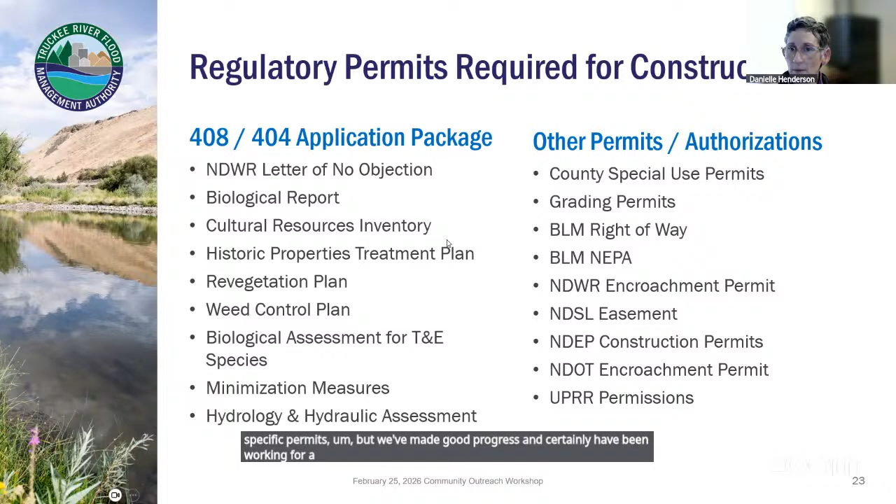We also have other permits and authorizations required, including special use permits and grading permits. Part of the project, as George showed on the property map, includes a parcel of land managed by the Bureau of Land Management, so we have to apply for a BLM permit. We've also got encroachment permits, easements, construction permits, and other permissions, like dealing with the railroad. So we've got a ways to go on some of these more localized or specific permits, but we've made good progress and certainly have been working for a long time on the 408, 404 package.

Again, we made a lot of progress in 2025 and it was very encouraging. This was part of why we decided to move forward to 100% design with Vista Narrows, because as you know, we can't construct the project until we get permits. So, like I said, we submitted this updated application package and drafted an environmental assessment.

The Corps of Engineers actually got back to us—they reviewed the documents and sent us comments. We've since revised the environmental assessment and responded to their comments, which numbered roughly 100 by the time it was all said and done. We're still addressing a few of those comments, but we've given them an updated version of the EA and a response to comment log. All of that is very positive, and we were encouraged that they were able to review our documents in a timely manner.

Moving forward in 2026, we're going to 100% design with our incumbent team. We've got hydraulic modeling work underway to better characterize the effects of just the Vista Narrows terracing work as a standalone project.

We really want to bring that out in the environmental documentation, really trying to characterize those effects and the fact that we are avoiding, minimizing, and mitigating whatever effects we have from this project. We're continuing our cultural resources work and coordinating with tribal representatives.

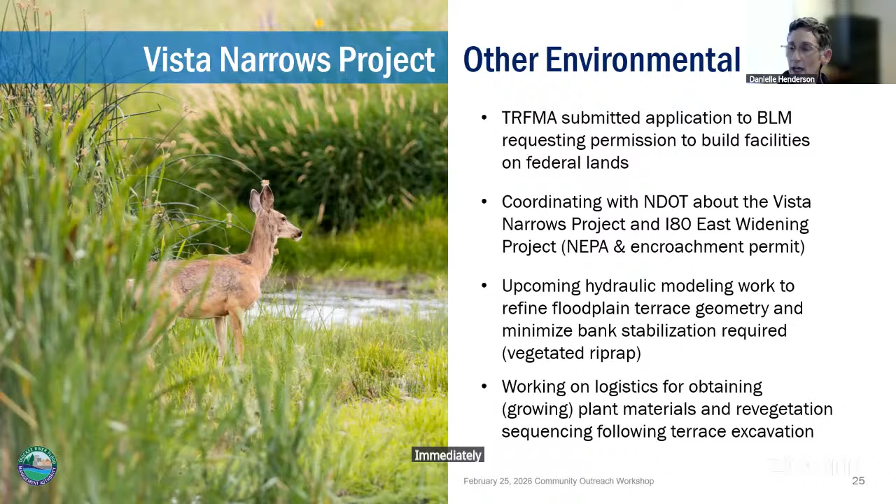We've got upcoming hydraulic modeling work to refine that terrace geometry. We're really hoping we can minimize that bank stabilization that's required, and we're working on logistics for growing plant materials and sequencing the revegetation immediately following the terrace excavation.

So in summary, some of these take-home messages are that I just want everyone to understand the agency remains committed to that original vision put forward by the Community Coalition. Our goal is really to design and construct a project that reduces flood risk, but also provides other benefits and recreational opportunities in order to create a more resilient and sustainable community.

As you can see from George's talk and my presentation, we're using the best available tools and technical information we have, along with some innovative methods, to achieve this goal. The ecosystem restoration projects we participated in the downstream reach have really served as a great reference for Vista Narrows and other portions of the flood project.

With that, I'm happy to open it up for questions and discussions, either on this portion of the presentation, or George and I can answer any other questions you might have on the project. Thank you very much for your time.

I will stop sharing my screen now. Okay, I don't know, am I facilitating this? I've still got it, I put it on my phone. So does anybody have any questions? Go ahead and raise your hand. I see a couple.